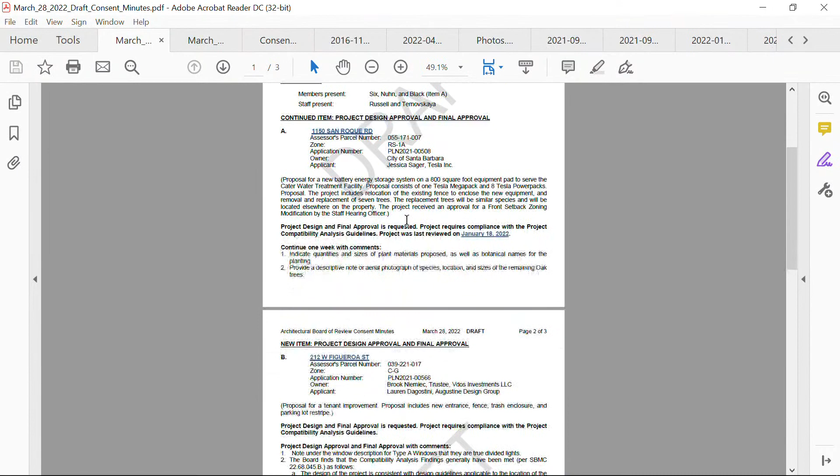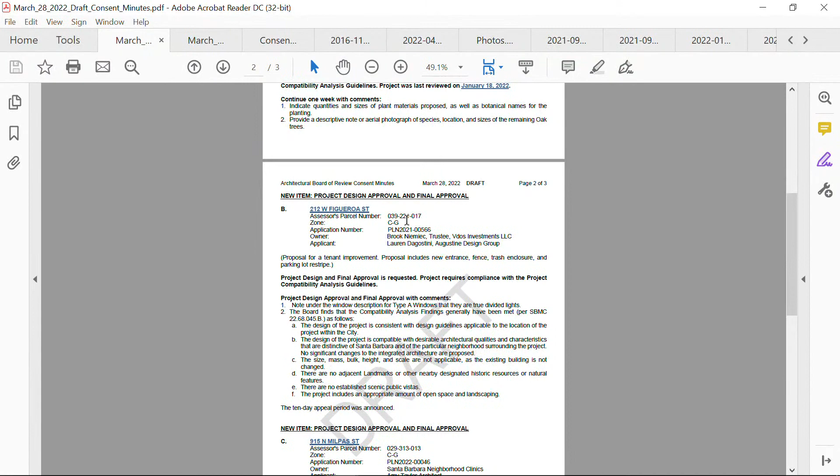The consent calendar for March 28th: 1150 San Roque Road was continued one week with comments. Item B, 212 West Figueroa, was scheduled for project design and final approval, and that was granted with comments. Item C, the last on the agenda, 915 North Milpas Street, was slated for project design and final approval, and that also received PDA and final approval with comments.

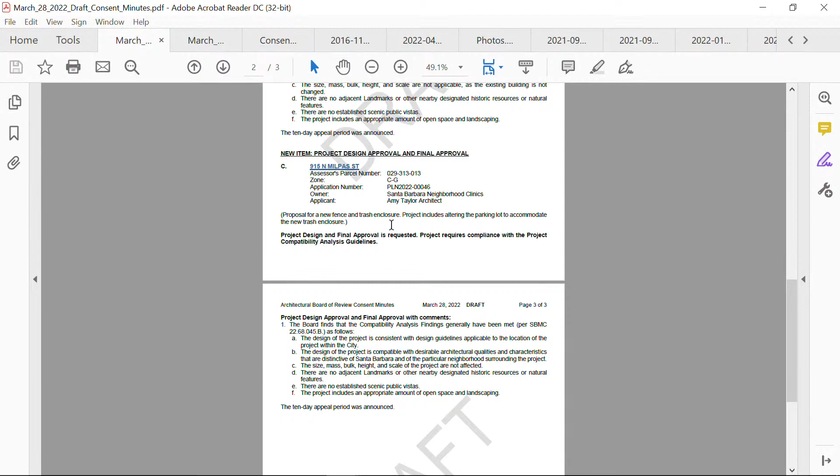Move we accept as presented. Second, by Vice Chair Six. Any discussion? Let's take a vote.

Chair Moore, yes. Vice Chair Six, yes. Board Member Anderson, yes. Board Member Black, yes. Board Member Nuhn, yes. Board Member Olson, yes. The motion carries.

Now moving to April 4th, today's agenda. On today's consent agenda we had two projects. 1150 San Roque was continued from the March 28th hearing, requesting project design and final approval, and that was granted today, PDA and final. Item B, the last one on the agenda today, 630 Garden Street, a proposal for 19 data collector units located on city poles, was also granted project design and final approval. Those were the only two items for the April 4th agenda.

Move we accept as presented. Second. Mr. Black, any discussion?

Under discussion, the second item involved quite a few pole-mounted units, particularly on streetlights — little solar panels, probably 24 by 36, with a smaller box on the other side of the pole. There are about 19 of them throughout the city. It verges on the side of visual pollution because there's so much there, but they did a very sensitive job of locating them. Their colors will match whatever pole they're on, and a lot of them are hidden entirely from public space, so they did a good job minimizing the impact. We felt it was approvable.

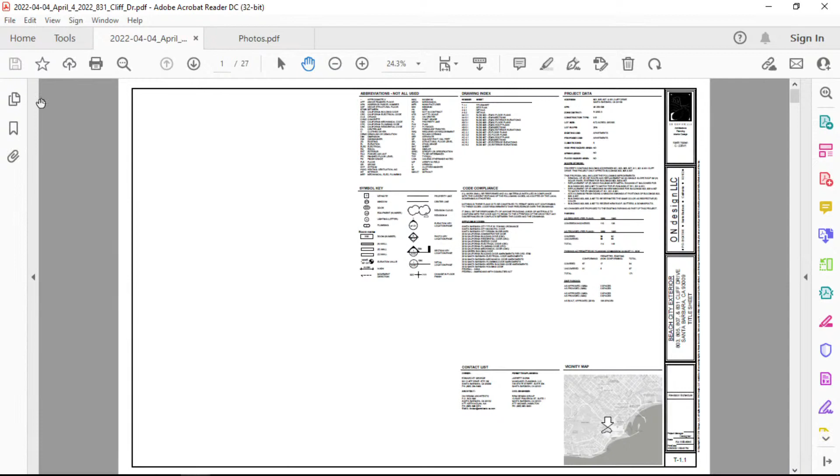I think if you want to just indicate it on the screen with your mouse, that would be helpful. Okay, let me get, I need to reorient myself as well. Is the Zoom okay for your visibility? Yeah, we have some hotkeys too, so like Z would be Zoom if you'd like to use that. Gotcha, thank you. Can I interrupt, Chair Moore?

Do we have the previous minutes? We do. If we look at them, and then perhaps address your presentation. Thank you.

I feel like we're on the cabin of the Enterprise. Say again? I feel like we're on the cabin of the Enterprise. It feels like it, yes, yeah.

Okay, this is what's up on screen, the previous comments from the last review. Thank you, okay. Can staff address item number 4?

Thank you, Mr. Chair. In doing some research into the previous planning approvals for this project, I believe the most recent approval for the abatement, like removing trees and other site work, was done in 2014, 2015. I cannot find in any of the motions of the ABR that they spoke to the colors of the building. There's been a couple reviews after finals, and the only one that I found, and I do have the minutes for your review as well, is from 2014, and it just stated that the colors match the existing buildings.

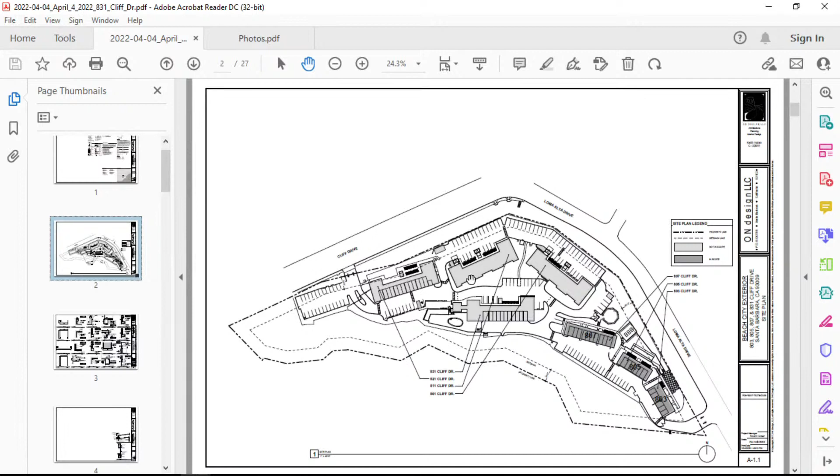Let me start with the plan set. I need to reorient myself to this being in person. You can see in the site plan we're talking about the southernmost 3 projects. One of the primary questions from your board was how visible are those buildings? At the time, the answer was not extremely visible, from my experience driving Loma Alta.

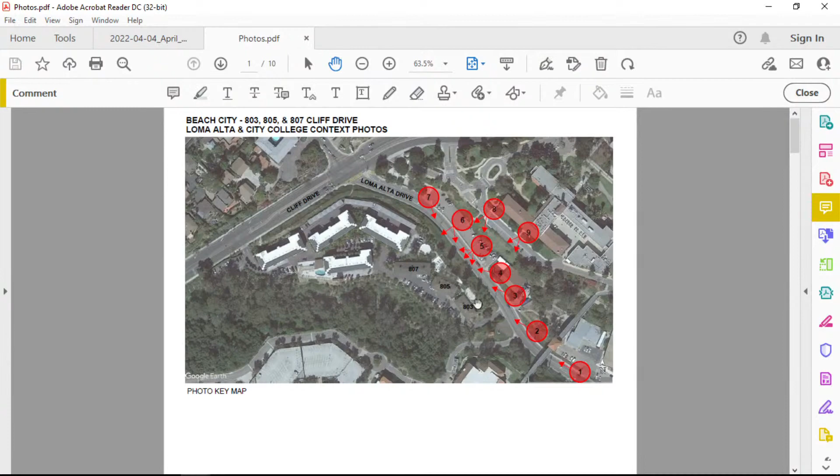I'll be sharing photos starting near the beach and driving up the street. The final two locations are from City College, which is at a substantially higher elevation. The lower building is 803, which we'll see first as we approach the City College Bridge. You can just barely see it in the distance there. It's the least visible building - it's lower and substantially hidden by vegetation, but you can see some of the blue wall there.

As we continue up the street, you begin to see the middle building, the yellow building, 805, coming more into view. It's the most visible of the three structures. Although these are backlit, at the top right you can see where you're directly across from that building - looking up the hill, that northern, northeastern elevation is visible. Continuing up Loma Alta, now looking back towards that same building 805.

When we get to the retaining wall, the uppermost red building is really barely visible at all. Now we're up on the City College campus - granted it's very backlit. At the top left, this structure is not one of the three in scope; that's one of the existing three-story apartment buildings at a much higher elevation. Our red upper building is hidden behind vegetation largely there, and you can see the yellow building, although it's backlit. Because it was late in the day, the yellow 805 is more visible in this view.

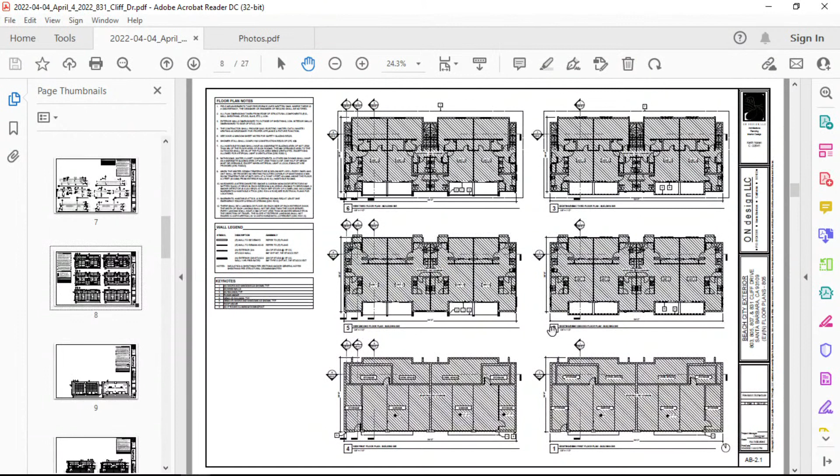Okay, I'll use the 805 building as an example because the remodels are all generally the same, and then we can compare the elevations for them all. The floor plans show no interior changes, so I won't spend time on those. Looking at the roof plans, here at the bottom right, you can see the hip roof arrangement simply going to a shed roof, 2 and 12.

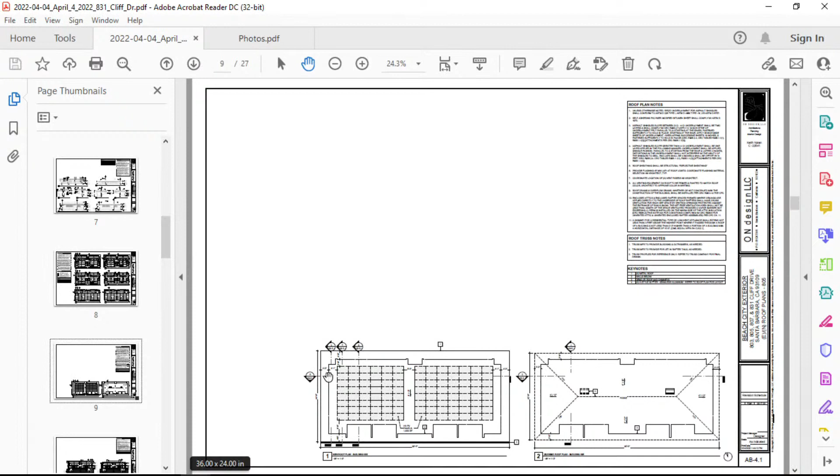Looking at the sections, which really tell the story, here on the right you can see the existing section with the hip roof, now going to a shed roof at 2 and 12. Board member, you had asked about the elevations—we'll see it there. In this case, with our bit of a larger overhang, we're just peeking over the top of what the existing max height was.

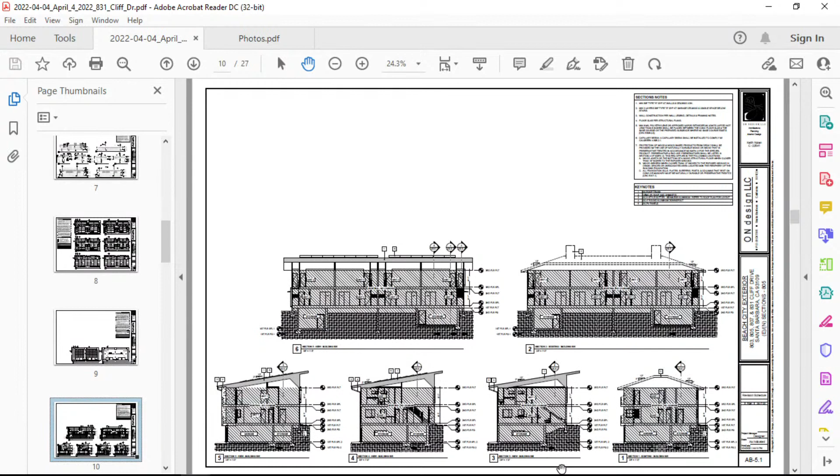And now we'll look at our elevations here. On the right side you can see our demo elevations, and on the left, the proposed shed roofs, generally following the sloping of the site. Each of these three buildings is on a sloped location where they have additional basement garage parking.

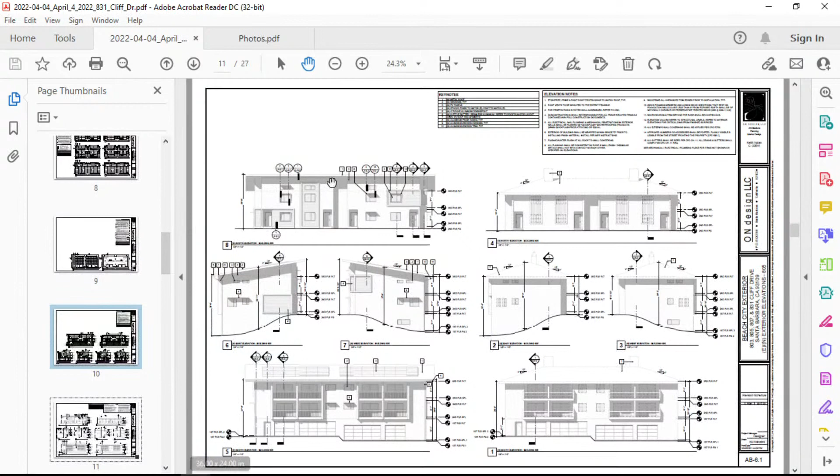Okay, could you zoom in on... let's see, coming over here. So this is the primary addition. If you want to, use the H key, you can move it around—hit H. Gotcha, okay, it's like the hand tool, you can pan. Got it.

Thank you. So this is the first example elevation where previously we did not incorporate the detailing seen on those other buildings. Now for each of the buildings, I'll quickly show an attempt to use that same language to add some interest to the new, admittedly higher, north-facing elevations that we end up with. This is building 805 at the middle.

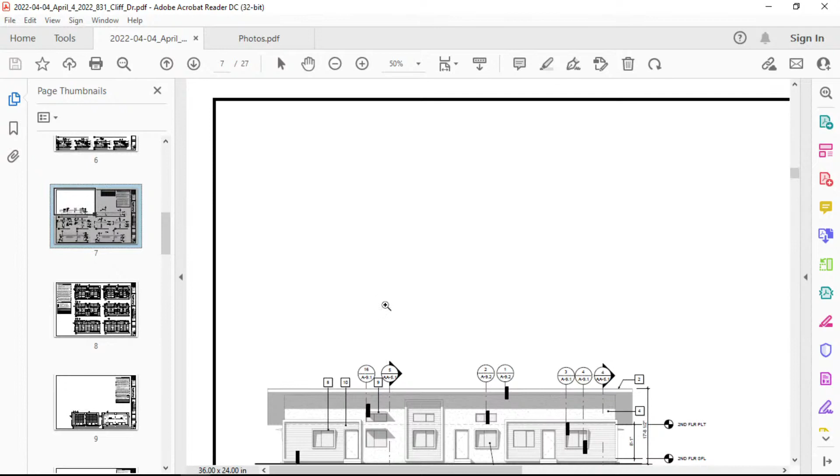And just to interrupt one more time, Control 0 takes you back to the full screen view, if you want to use that. Gotcha, thank you. Yeah.

Okay, here on 803, this was a structure that was really a one-story elevation on the uphill northern side. Now it's using some of that ornamentation to help fill that elevation, speaking to the existing design language that's out here—that is the intent.

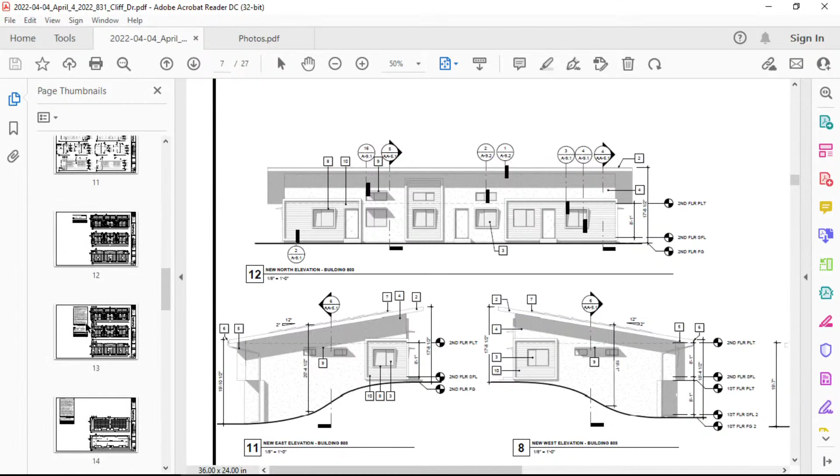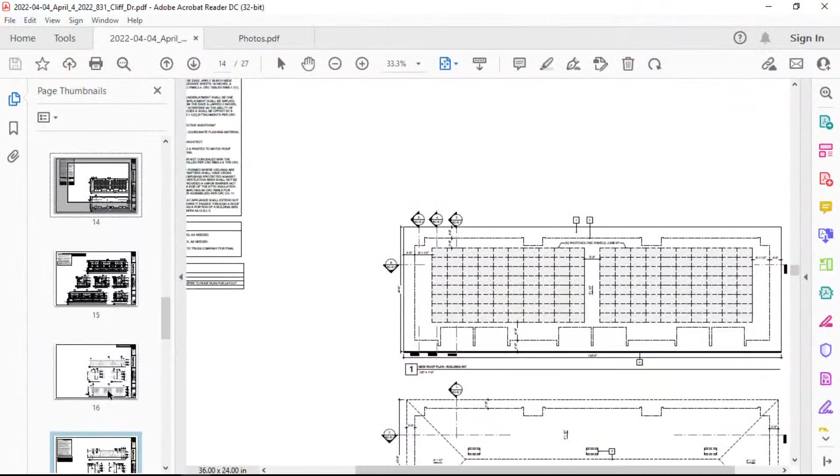Okay, and then lastly, looking at our largest building, 807. So here we are—I'll focus on the front and side elevations. This ornamentation was used on the other buildings in a way intended to bring some sort of movement to what are pretty standard boxy footprinted buildings, and that at least was my intent in using some of the same language on these buildings.

And I'll say this building, 807, is also an example of extending some clerestory windows above that existing 8-foot plate, again to help fill that north-facing elevation and take advantage of some of that north light at the same time.

At this point, I don't think we need to go over the details necessarily. Suffice to say the intention behind the ornamentation is to match the existing detailing that's out there, and we can certainly look at those in detail for final when we get there.

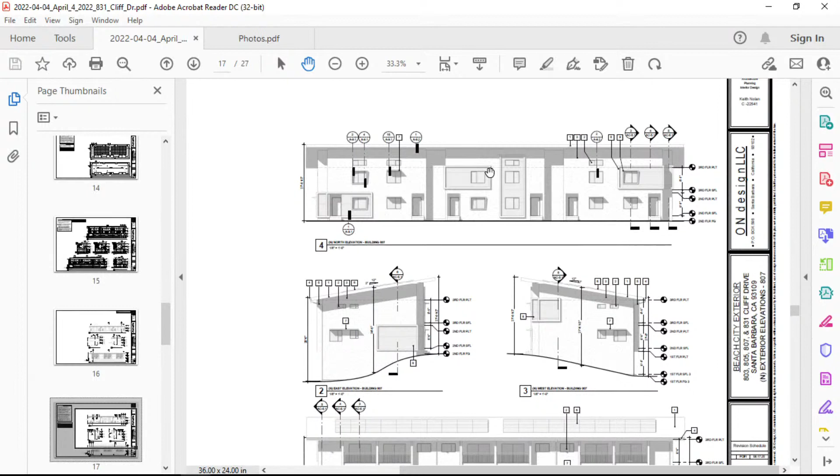Lastly, there was a question about downspout locations. We did interact with Jim Rumbly at Creeks, and his request was simply that we ensure the new downspouts will land in planters before being conveyed, if needed, to the BMPs, to the permeable paving already out there. That is the intent, and the elevations now show the downspouts. We'll include more detailing about that in later stages.

With that said, I believe the last item from the minutes is to confirm the color choices. I was not involved in the site at that point. What I've been told by the site manager is that yes, those colors do match what was discussed, though I was not able to find any documentation. Okay, thank you very much—I'm happy to answer any questions.

We can open public comment for this item. Is anybody who'd like to address the board? Seeing no one—did we receive any written correspondence? Thank you, Chair Moore, we did not receive any written correspondence for this item. Thanks, so close public comment. Go to questions from the board.

In the past we just kind of picked one side and moved down the line. So, Mr. Olson, do you have any questions?

Yes. So you referenced that these additional details are matching those from a previous remodeling on the other units. Correct. When were those approved? I don't know for a fact, Board Member Olson—my guesstimation would be between 6 and 8 years ago.

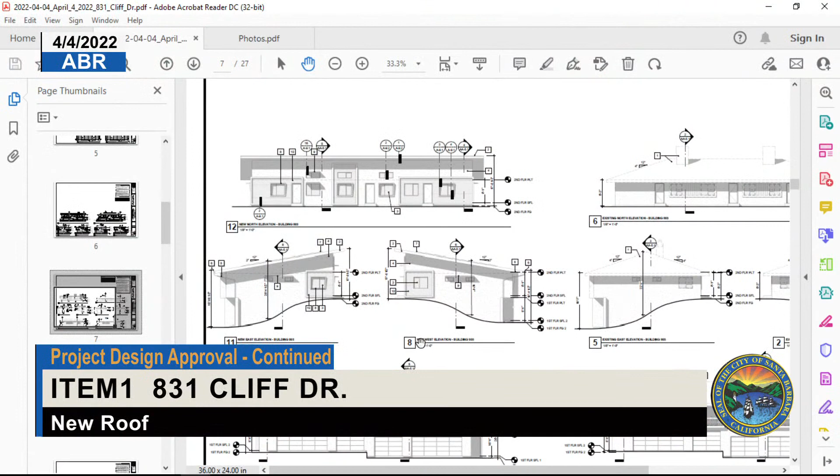Elevation 8 has no shadow box around that window within the horizontal siding, and then just right next to it - well, it's on the opposite end of the building - it has a shadow box. So I'm a little confused. It just seems a little arbitrary sometimes on when it is applied and when it isn't.

Board Member 6? I could try to find another adjective other than arbitrary, but admittedly, it's not a very formal, rigid use of these systems in each location. It would seem to me that in one elevation in particular, elevation 12, when they're so similar in size and location, both of them would receive the same treatment - and a little less arbitrary.

Thank you, Board Member 6. I do hear you. I think one of the thoughts in my mind was that at times those shadow boxes can read quite heavy, perhaps especially on a 1.5-story elevation. The thinking was to keep them from reading too heavy, but looking at it now, I can certainly see where you're coming from.

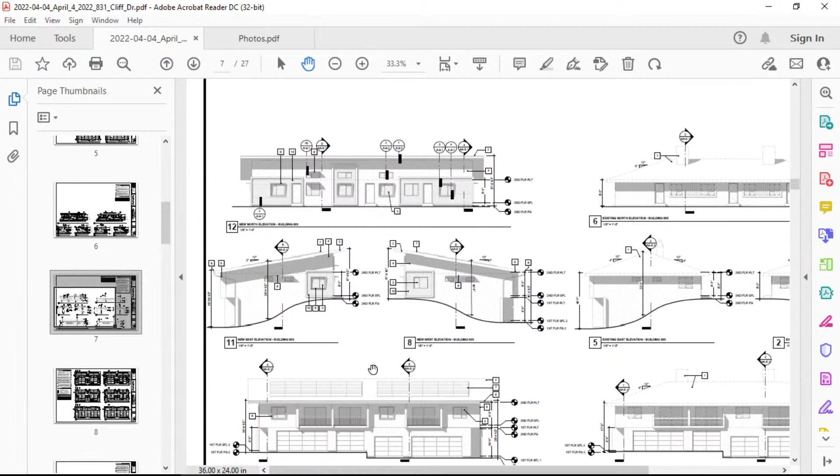Well, I don't think 11 and 8 are on opposite ends of the building, so I don't think it matters that much there, but maybe like on 12, on the clerestory window flanking - well, you see where I'm going. One has a shadow box below it, and one has an awning, so it seems like the images of the prior project had a little more consistency. It's a subtle thing, but being a little more consistent within each elevation would help. Very subtle, but that's my comment.

Okay, Ms. Anderson? Are you replacing all the doors and windows, or are we leaving those the same? Replacing doors and windows, with the intention to match the look and feel of the existing remodeled aluminum frame windows to the extent possible. Let's do this one. Okay.

And I guess this is more to the board members - I don't know if I can ask, has that been approved, like those remodels? Or they can't ask about that? Never mind. Okay, my questions have been asked.

Just have a couple follow-up questions. On elevation 12 on the screen here, as the metal material approaches the corner, is that mitered and turned around the corner, or is it two separate boxes, like two separate jams that it comes through? I believe there's a mix of both on the site, and looking at elevation 12, you can see the jam, and then that wraps the corner from here.

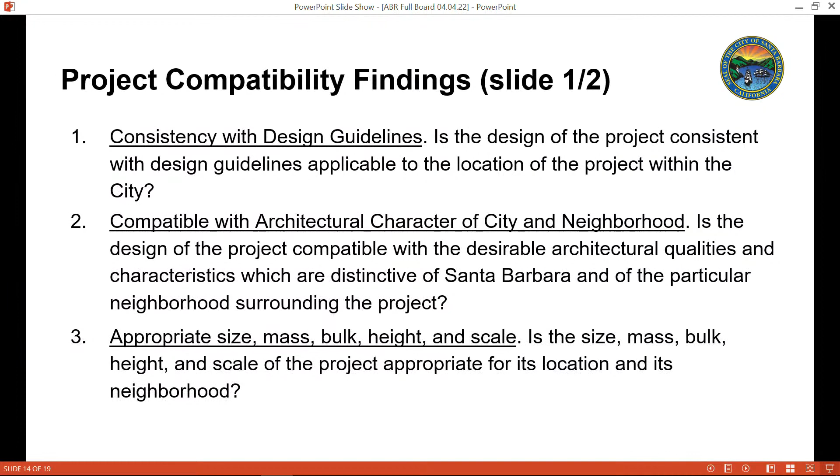Number three, in general, the project size, mass, bulk, and height is appropriate for the location and its neighborhood. Number four, we're not aware of any adjacent landmarks or historic resources. Number five, it does not impact any established scenic public vistas.

And number six, it is not changing the amount of open space or landscape. I'll second that. Okay, any discussion? Okay, let's vote. Could we hear the motion, please?

Oh, yes, let's read the motion. Yes, thank you, I'll go ahead and read it back. So the motion is for project design approval with the following comments. Number one, the board appreciates the efforts to incorporate solar design into the project.

Number two, the applicant shall reduce the slope of the roof to the greatest extent possible in order to reduce the overall height of the building and reduce the clerestory element on the northern elevation. Number three, the exterior detailing as proposed is acceptable.

Number four, the board prefers a more muted color palette than what currently exists on site. Number five, the board understands that staff will provide research on the colors from the previous submittal at the next hearing for this project. And number six, the board made the compatibility analysis findings with A through F met.

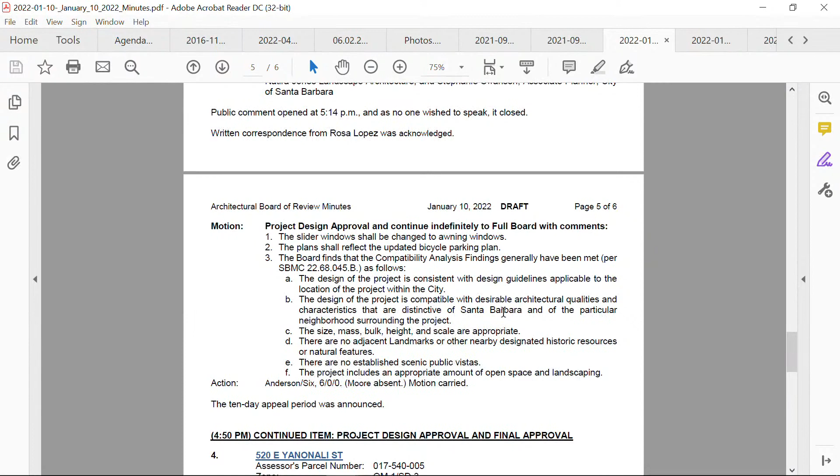Okay, so welcome back. If you could focus on those elements and just do a run through of your materials board and detailing, kind of focus in on the final aspects. Sounds great, Dylan Chappell, architect for the project. Thank you for having us. I'll just jump right to that because I think we're all relatively familiar with the project.

So the minor updates since this last meeting, we stacked a few more bikes in the back. You can see the cursor back here. We have 2 bikes located here, and then there are 7 back there.

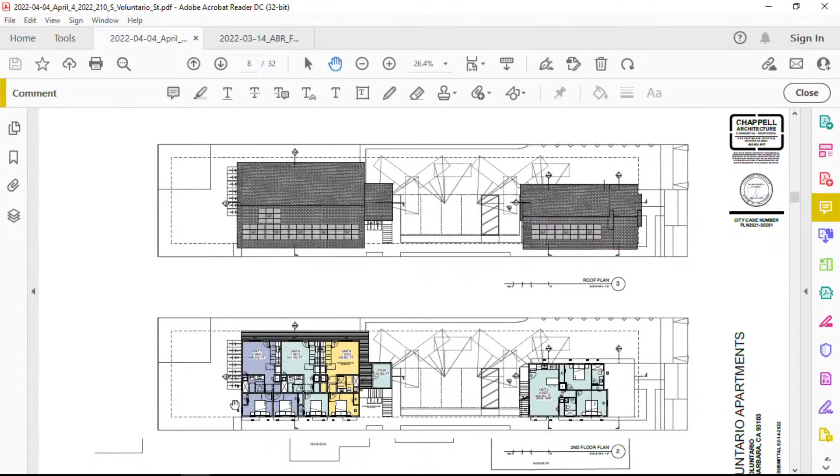There was a comment on essentially removing the slider windows. So the sliders are now called out as awning windows, and we can look at that in the window and door schedule, also on the elevations, but I don't think the elevations really have changed since the previous meeting.

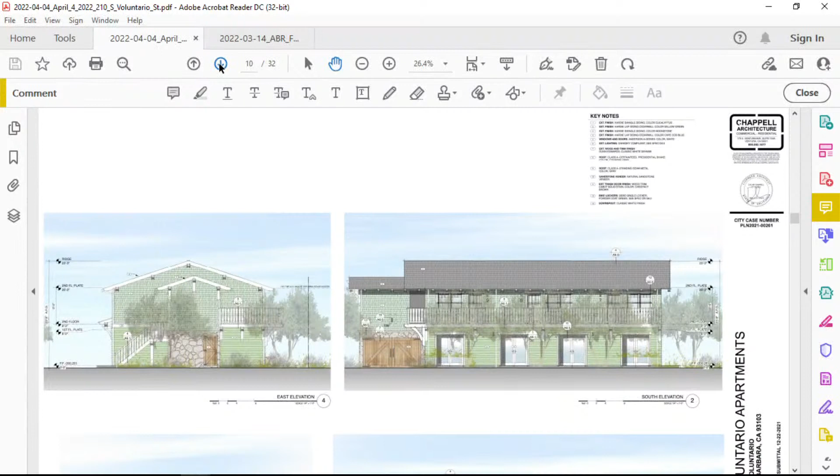Sorry, this is the first page of details, but if you zoom out and then back in, it'll refresh. There's the plus minus. Oops, it's not loading. As you can see, we went with very simple design details.

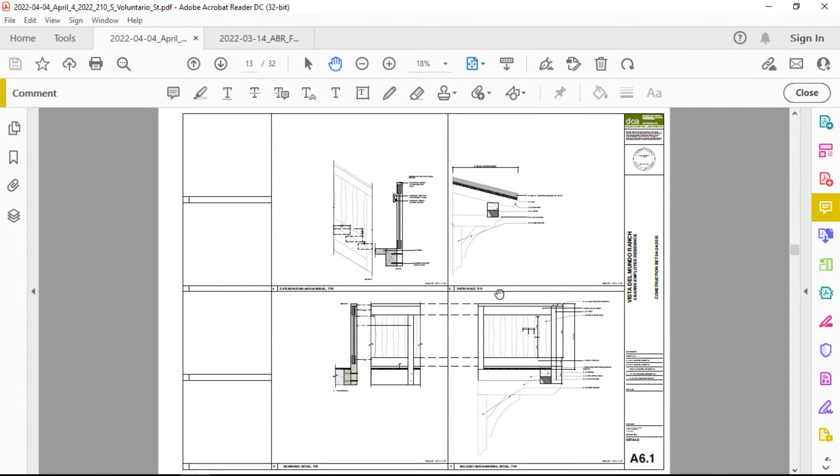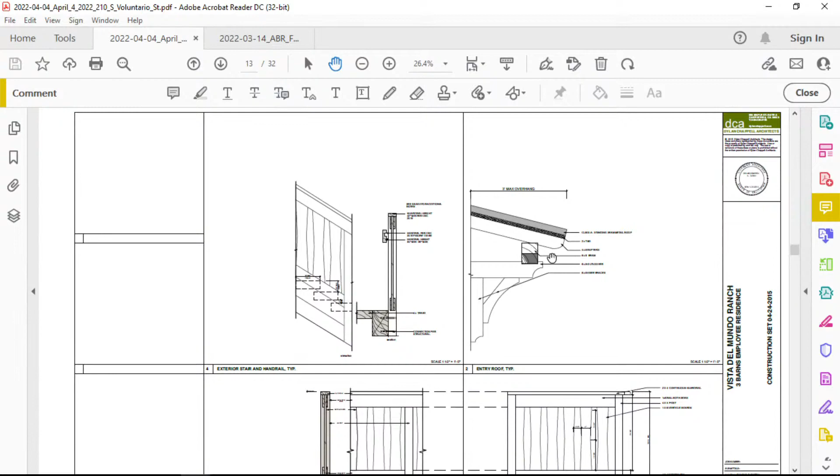It doesn't, maybe just use the plus minus. That doesn't work either. If it's not working well, we can take the controls back. Well, we can try, are they saying it's my driving? If you would like to go, feel free, if you think that'll work better. And you know what, it's the same controls, so I can just give you the keyboard and mouse if I request them back.

So the board unfortunately will have to swap to my display, but you will not be able to see them on those. Okay, that's fine. I think I can do this. Good, we got this. There it is, apologize, this is our trial, initial day doing this, so you all are all guinea pigs. Yeah, thank you all. Okay.

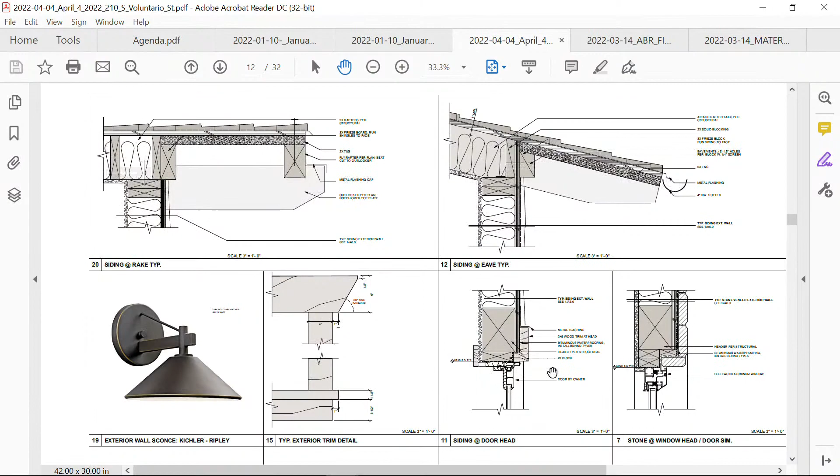Here's that first page of details that did not load. We have some typical eaves and outlookers. If you look throughout the plans, we have some decent sized outlookers and details throughout. Right here I'm focusing on sheet 15, our typical window and door trim detail. You can see we have some inset windows and doors. The main materials are going to be siding, and then there's some stone near the trash enclosure.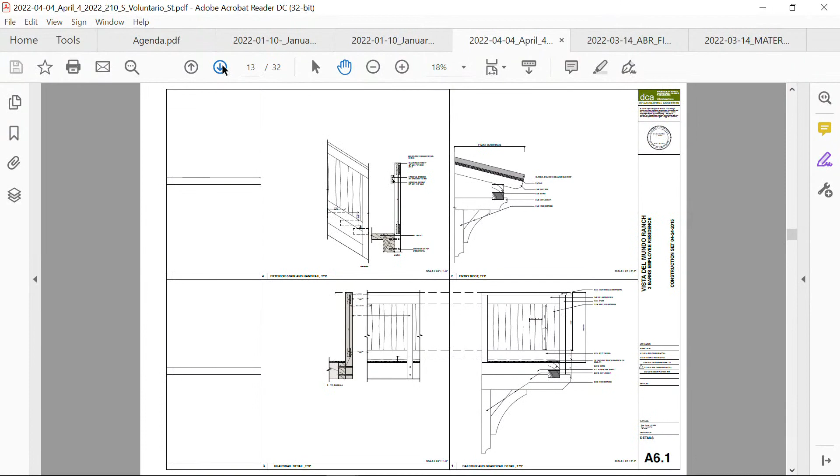Details, this window and door schedule, this is where you see the awning windows called out. There's no sliders.

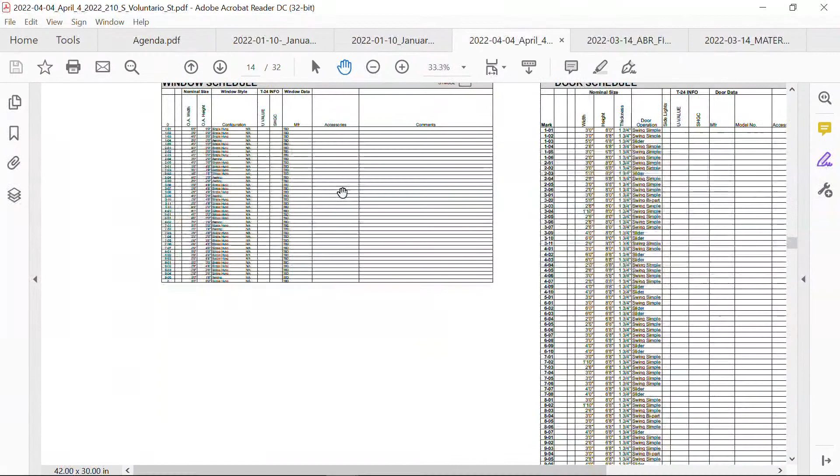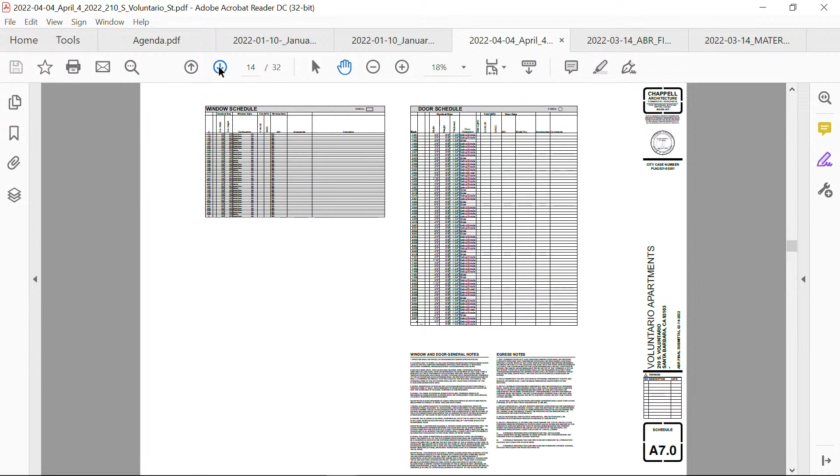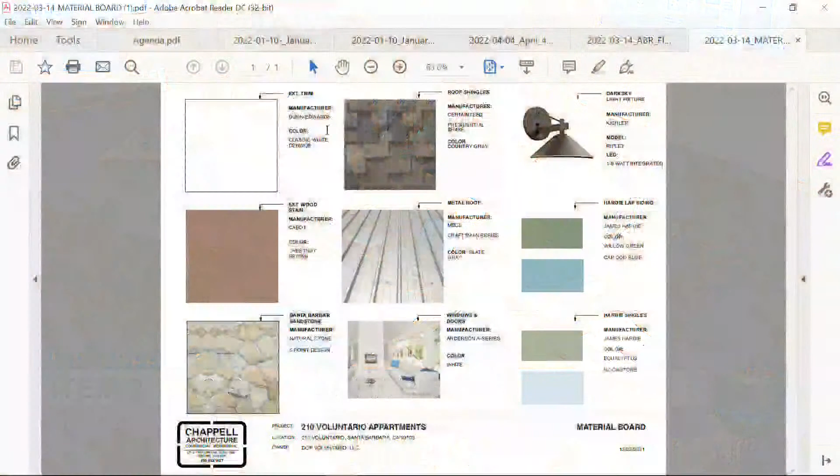And I think, was there one other item that we wanted to? Colorboard. Is that going to be in this? I do have, from your March 14th submittal, it's that far right PDF. There we go.

Here's the color material board. We have white exterior trim, CertainTeed presidential shake roof, the lighting fixture I showed you. This obviously is not the greatest representation, but that's a Cabot chestnut brown stain. We have a standing seam roof. This is just over those entry roofs that was in the detail.

And then the Hardie lap siding and Hardie shingles. Essentially, we went with two similar colors, one lighter and darker, for each. So I believe the greens go on the green building and the blues go on the blue building. Andersen, just white windows and doors matching the trim, and then in the areas where there's stone, it's going to be actual sandstone veneer.

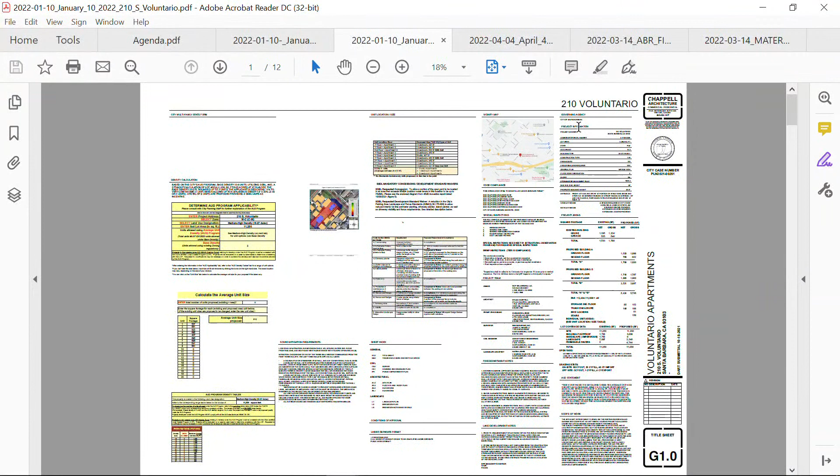That plan set to the right of this one was the one you were just managing. Okay, thank you. And then the one, second to last one, would be the one with the landscape. Yeah, and I think that would be 32. Okay, so you can see kind of the colors a little bit better here. There's the colors.

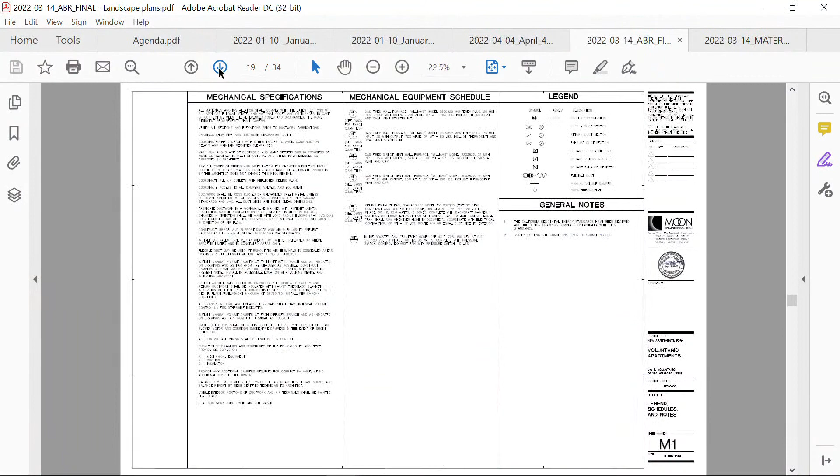Consultant drawings, I'm just going to click through those unless you guys have any specific questions. Just the landscape. And then I don't believe the landscape has really changed since the last presentation that you saw. Just the one additional bike parking space over here, and then the two that are here.

Feel free to keep. Okay, great, does that conclude your presentation? That concludes, thank you. So we can open public comment.

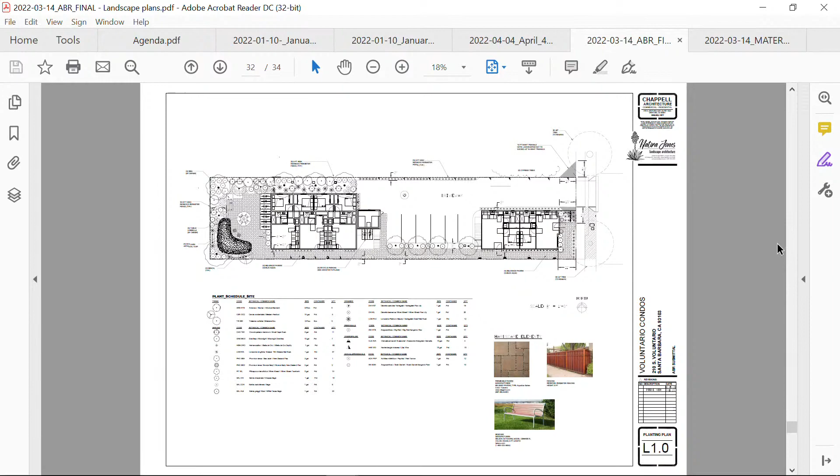Is anyone in the audience here to address the board regarding this project? No? Okay, did we receive any written public comment? Thank you, Chair Moore. We did not receive any written correspondence for this item. Thank you, we'll close public comment.

Go to questions, starting with Ms. Anderson. No questions. Vice Chair Six. Yes, can we do a quick review of the exterior lighting as we need to approve the lighting guidelines?

So a plan showing locations, and it's just the one fixture, correct, all throughout? You can also, pardon my interruption, click on the number, the PDF to the right, and then just type in a lower number page rather than going through every single one, if that's easier. Let me see where we have that called out.

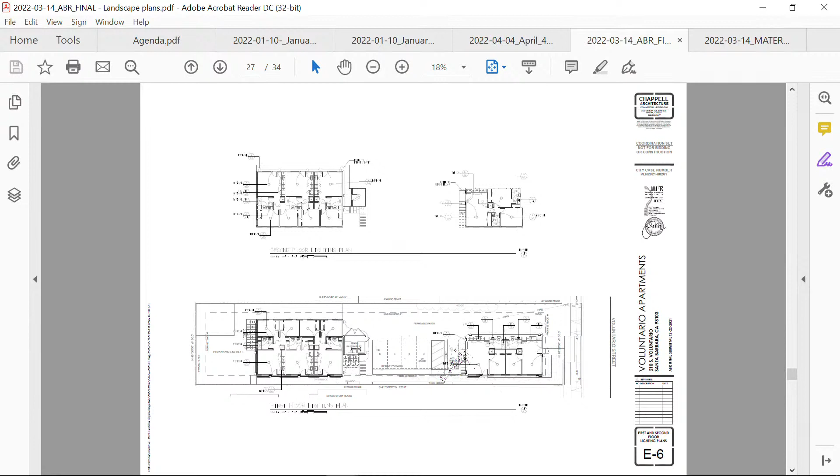Floor lighting plan. So he's got some fixtures located throughout, first and second floor. They're probably a little hard to see, but I think you're seeing them there. So if you can zoom in there, that'd be helpful. Different keyboard, bear with me, sorry you guys. You're doing great, yeah.

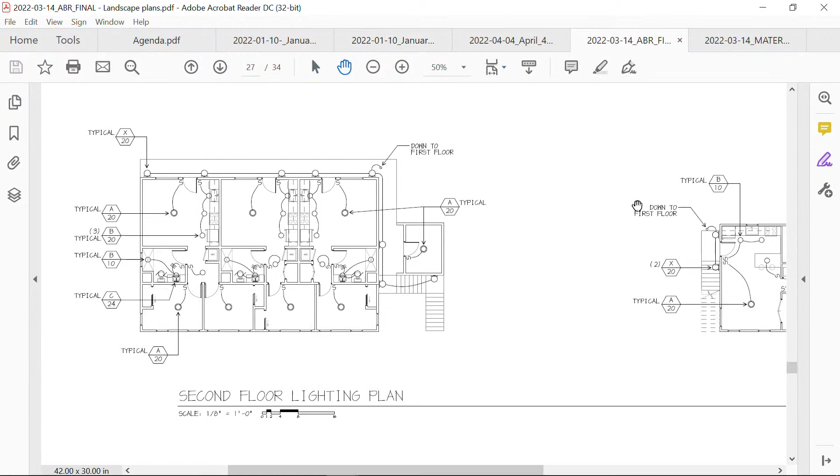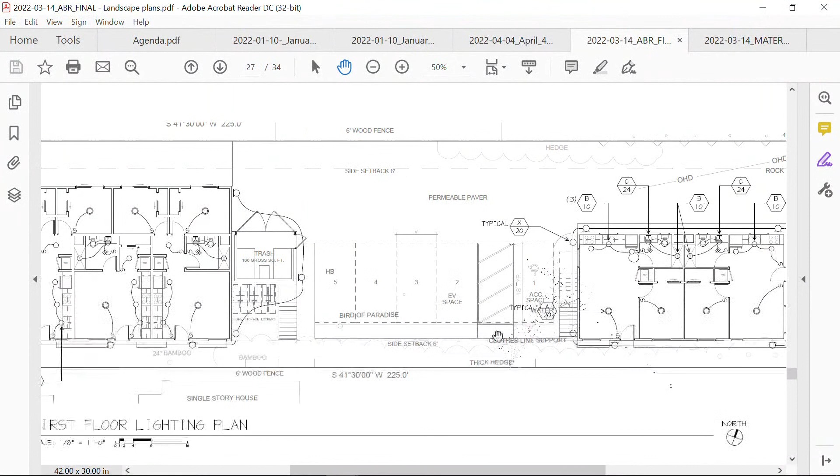You see them called out throughout. So that's the second floor walkway. Yep, that's the balcony around the second floor and the second floor stairs. This is the walkway, the entry to the second floor of the building in the front. And then you can see them called, shown and located around. Same thing here. And that is the same fixture throughout.

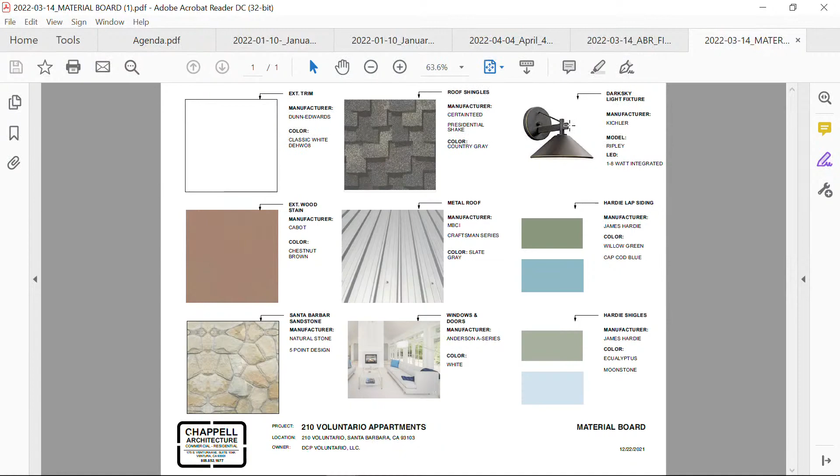We're here for final? Yep. Any questions?

No, just one comment. Quick question, is there an irrigation plan associated with the set? There is. Okay, my question is, as I always ask, where is the backflow preventer, and would it be properly screened, or is it in a place where it could be seen? Do we know? And I'm sorry, could you please approach the chair so our microphones can pick up?

Which one of these? Correct, I think it's that one. Yeah, it starts on 32. I believe that's correct, and then the irrigation is next, 33. Okay.

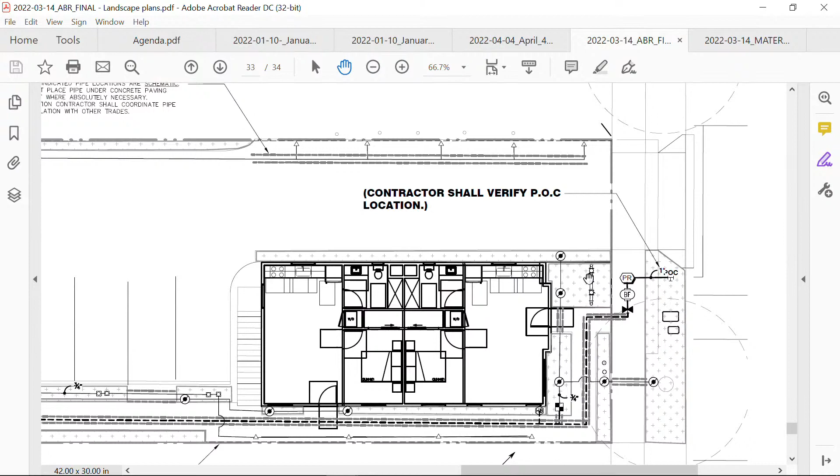So the backflow is, you can kind of see it right off the street, off the sidewalk. What sort of plant material do you have in that area to screen it? I believe it's, just double check the planting on that one. I believe it was the Anigozanthos, just double check. The Lomandra breeze, which can get up to 3 feet. Okay, great, that's all, thank you.

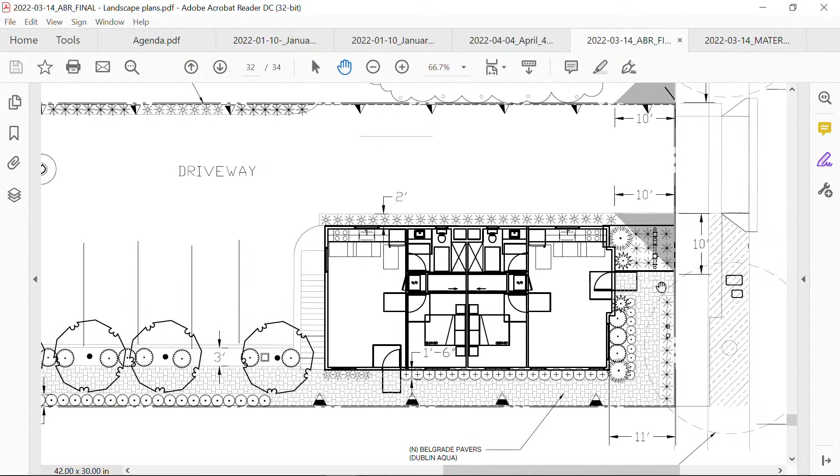Just to confirm, were you asking about the fire backflow or the irrigation? That's why I asked about the irrigation plan. It looked like the image was for the fire. Is that fire right there? Where's your irrigation backflow, diagrammatically? It's to the right in the diagram, that's it. Yeah, so then it would be right in the middle of the sidewalk. It would be in that planter adjacent to it, for the fire hydrant.

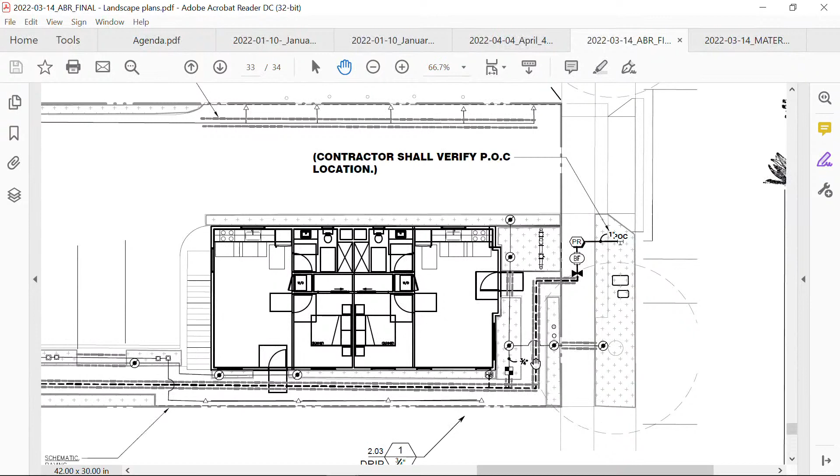Up above. Do you want me to move the mouse? Yeah, I was going to put it just diagrammatically, it's seen in the sidewalk. Use the mouse, oh okay, right there, sorry, and put it in this planter, and then Lomandra breeze all around. Got it, okay.

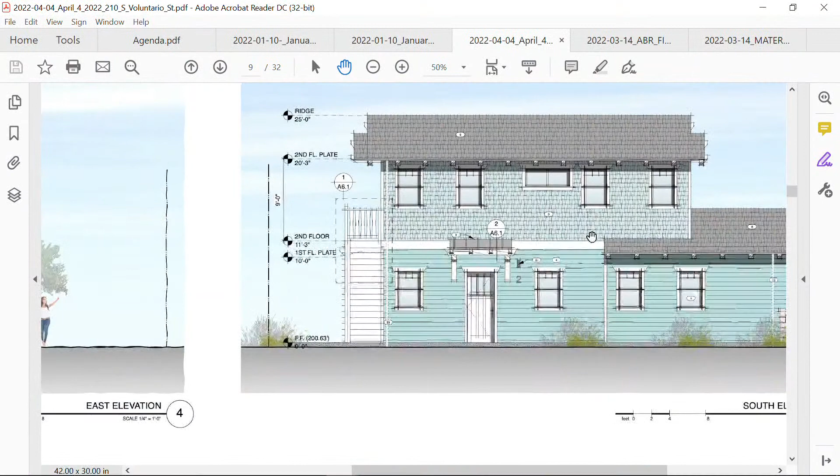Just wondering if myself and the board's opinion of the height of that awning - is it that high for a reason? Are you talking about this entry awning? Yes, right here. Maybe, am I - yeah, you're right, it's a little high. Is there a functional reason why it's that high?

No, I think I was just lining it up with some of the materials and that kind of belly band, but the approach is front, you don't have a clearance issue from a side approach to the building. 80 inches clear? No, that is a tightish walkway, but I think it's fine. But if you think it should be a little lower, good catch, yeah I would - it looks like it could drop a little. It looks like the cross beam is about at 10 feet and the knee braces stick down below that. Yeah, if you can get the clearance for the approach, about a foot lower, I would lower it. Put in an 8-foot door.

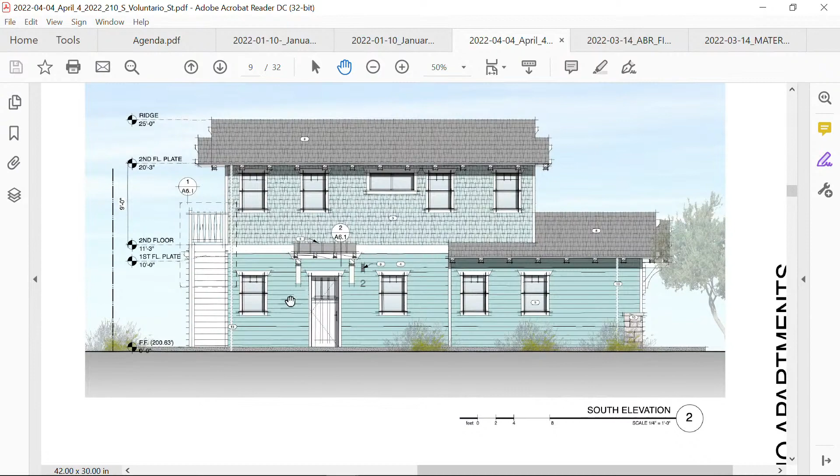Do you have others like that? Yeah, yes, that's consistent. So there's similar positioning of others like that, correct? Let's go to here. Yeah, so if you want all those to drop a foot, I don't think that's a problem. Good catch.

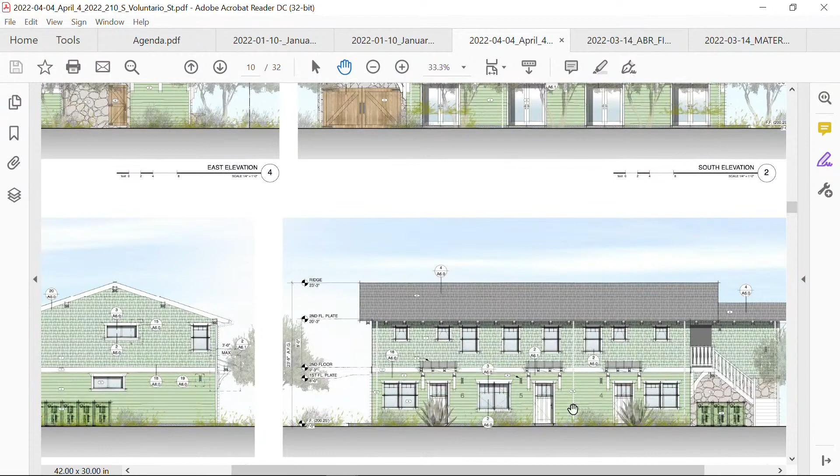Okay, there's my question and comment. No questions, I don't have any questions. Before we jump into comments, is staff able to - if we drop entry canopies and awnings 12 inches, is that something staff can review? Include that as a condition, and then when we review it in the building stage they would verify that. Okay.

Ms. Anderson, do you want to start with comments, if you have any? No, I think it's ready for final. I think it's a very nicely detailed plan, a detailed building. Just one little caveat, I can't leave anything alone.

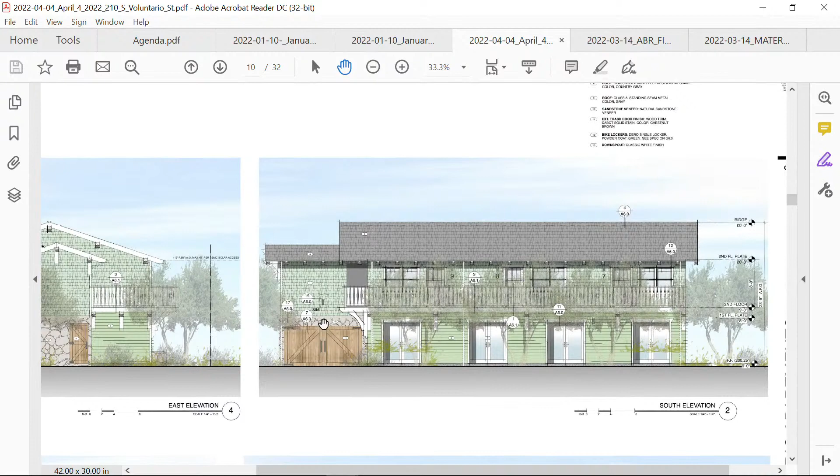If you drop down to the south elevation, the rock lintel that you have above that would be, I think, a lot more logical if you just brought your shingles down to the top of that door, or some wood trim. That's beyond the trash enclosure - no it isn't, it's in line with it. You're talking about this area right here? Yeah, and if I just drop the rock down to - so there's no rock above the door? Above the door.

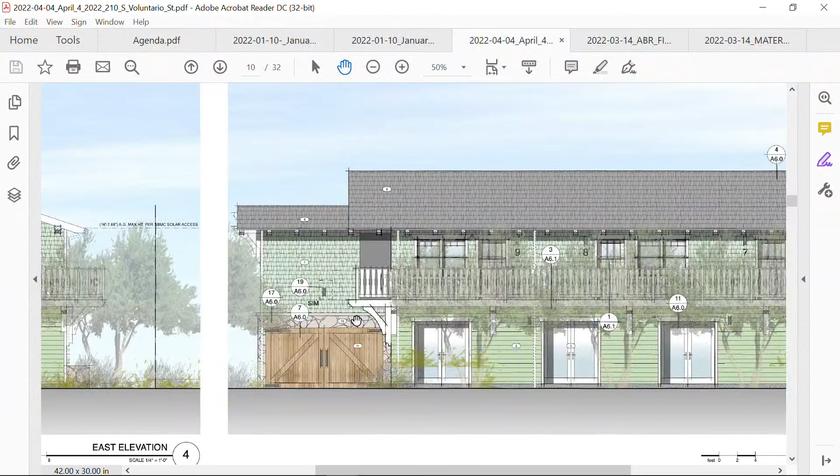I think a rock lintel that long is kind of awkward looking, it screams of veneer, and rock wouldn't behave itself like that, so I would drop it. I would keep your rock as high as you have it on the other side, but eliminate it just above the door. Just a non-binding comment. Okay.

Yeah, maybe do the same thing. This one's a little bit more believable, but yeah, that makes sense - just after the turn of the corner for that 8 inches, stay at the same height, but then drop it down above the door. Okay, and you'll probably struggle with eliminating it in the inside corner on the other side. It's up to you.

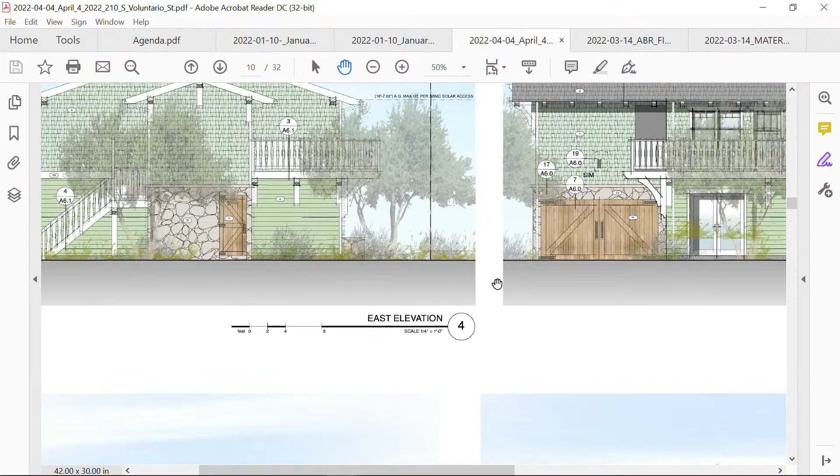I would eliminate that. Anything else? Nope, I think it's well designed. Mr. Black, any comments? I'd agree with those comments. Mr. New? No additional. Olson? I agree also with the comments. I'll support the comment that this is well developed, nicely detailed, and a handsome project. And I also support the omission of the rock lintel over the garage doors.

I forgot something. Another non-binding comment is to check the illumination of your sconces. There seems like a lot of sconces, and if they're very dim, that's good. If they're very bright, then perhaps want to look at that. Have it more manageable, less light. But again, that would be non-binding.